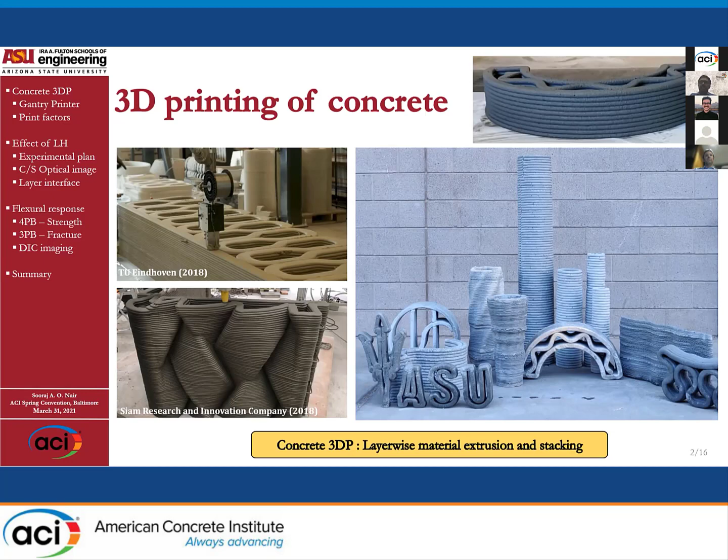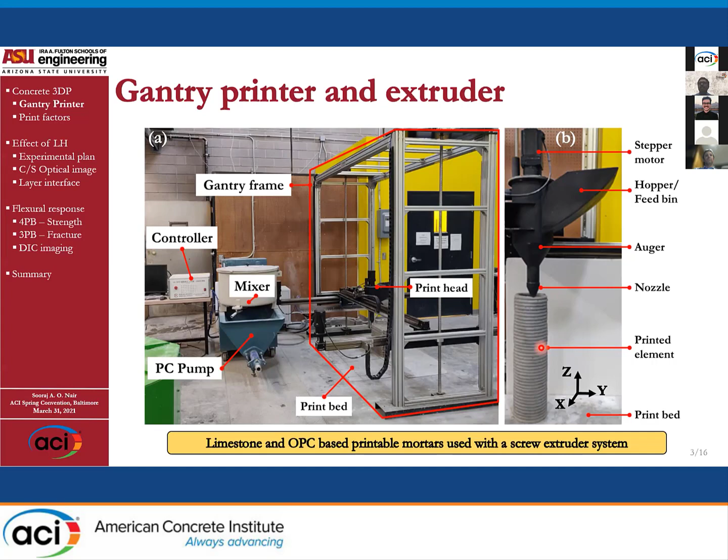But this whole presentation will be focusing on material extrusion, and this is the printer that we have used for this study. It's a gantry based one, with dimensions of approximately 1.5 meters in the XYZ directions, and we have a print head onto which a mixer pumps the material, but most of the time we directly feed the material into the hopper. It's controlled by a stepper motor with a screw extruder that extrudes the material to print, mostly limestone and OPC based printable mortars in our case.

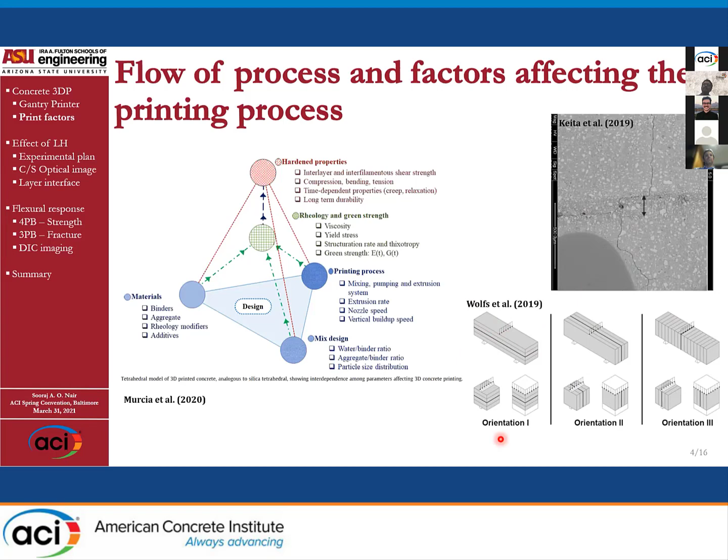Several other studies have reported relatively weaker interface regions due to drying or improper laying, which can affect your output strength. Because of these layers and the anisotropy, when we report the mechanical properties we generally do the testing in three different directions. But within the scope of this study, we'll only be looking at orientation number one, along the direction of the vertical printing.

As far as the experimental plan is concerned, we have a 20 mm diameter nozzle, and we take a typical filament having a layer width LW and a layer height LH, and we take values as a fraction of the nozzle diameter. In this study, we take 25%, 50%, and 75% of the nozzle diameter as the layer height, so it will be 5, 10, and 15 mm. The layer width is kept constant at around 1.1 to 1.15 times the nozzle diameter, so typically around 20 to

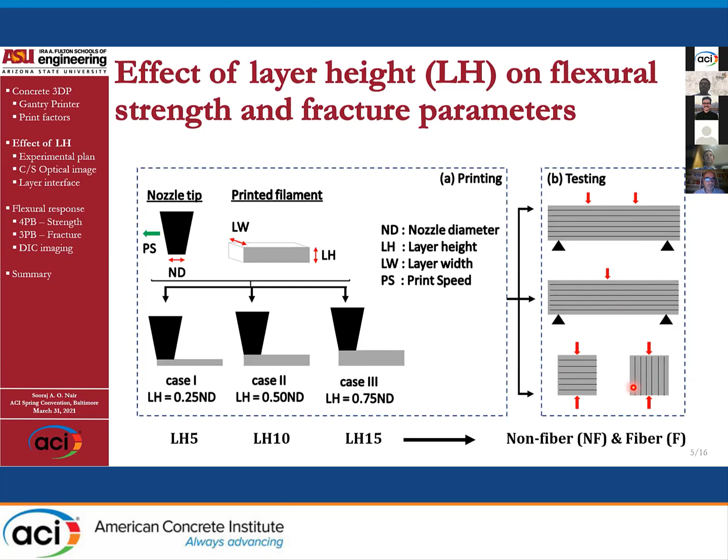22.5 mm. So we vary the layer height and then check the post-print hardened properties. Specifically, we do flexural testing, mostly 4-point bending and 3-point bending. We have an ongoing study looking at the compression effects as well, but for this presentation, we'll look at the flexural properties. We print slabs at these different layer heights, for the non-fiber and the fiber reinforced condition. The fiber reinforcement is 0.2% by volume of the overall mortar that we're using.

Then we cut them into beams of approximately 3 by 3 cross section, with a span of roughly 4 times the depth, and we subject them to 4-point bending for the flexural strength, and then 3-point bending with a notch to understand the fracture properties.

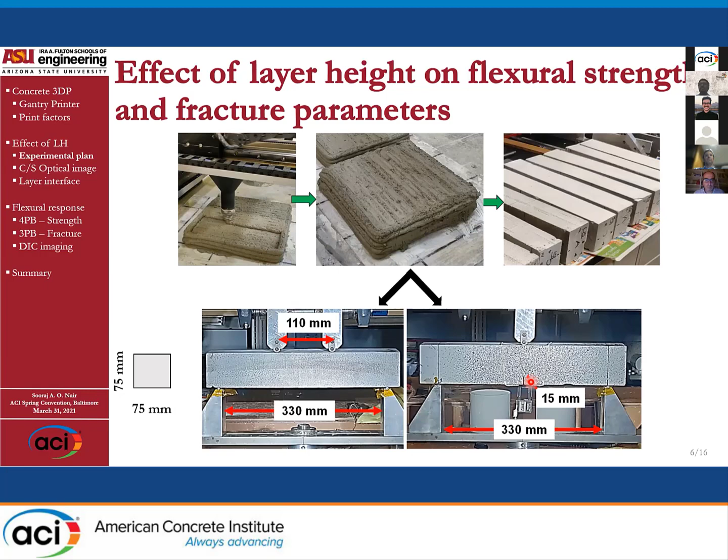Of course, after printing, we have to check the integrity of the printed beam. When we slice them to look inside, we see that when we increase the layer height, more defects are introduced. This is typically reported in literature. Although we made sure that the filaments are visually overlapping while printing and we don't see any gaps as such, we do see gaps between the filaments, and that tends to happen more when you increase the layer height, in both the non-fiber and the fiber reinforced case.

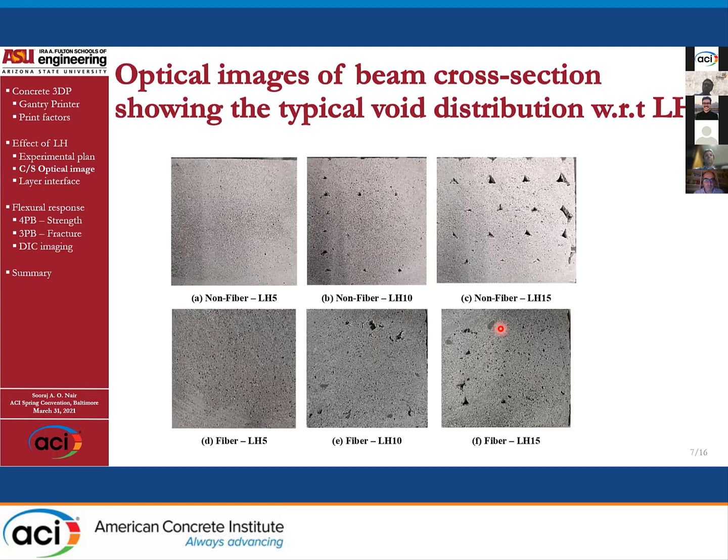So we have a non-fiber case and a fiber case at 5 layer height. Along the interface, we do see a micro pore present, which is typical because you have two different layers being laid one over the other. So there's definitely going to be a few air voids in there. But in the case of a fiber reinforced specimen, we do see the fibers sticking out. There are voids that encompass those fibers, or voids predominantly seen around the fibers.

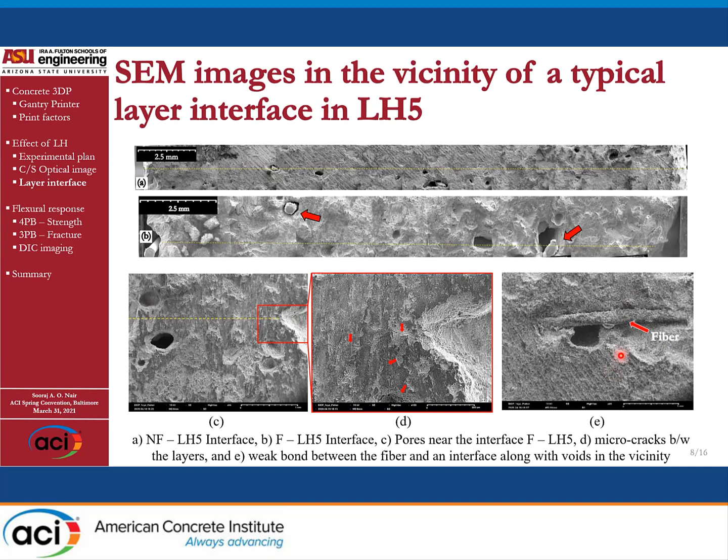The fibers tend to be dragged and scratch your interfaces to form more voids, and voids around the fiber. So the fiber to matrix bond also becomes weaker. As you increase the layer height, the chances for that scratching and dragging of the fibers, which causes defects in your printing, are much lower, and you tend to see better characteristics in flexural strength. The overall average flexural strength is definitely much higher with fiber reinforcement, almost 30-60% higher. But there seems to be a fiber to layer height incompatibility.

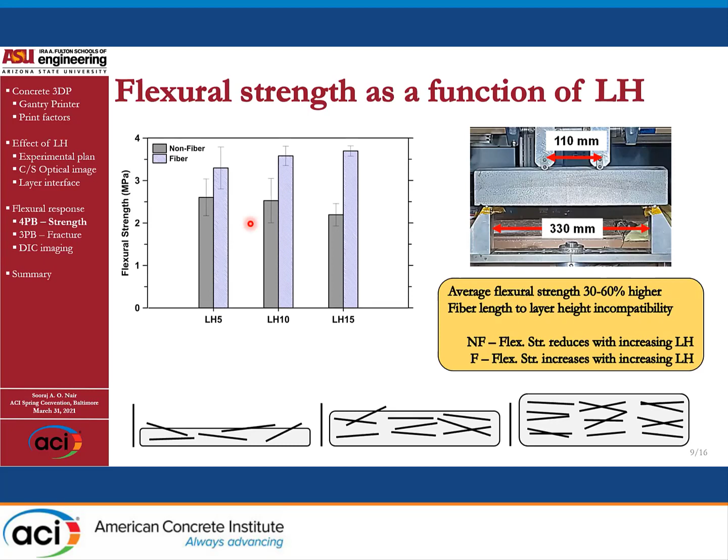And then we go for the 3 point bending case with a notched specimen. Specifically in this case, because it's a fracture characterization, we do a cyclic loading instead of the monotonic loading we do in the 4 point bending case. This one is for a non-fiber versus a fiber, and there is significantly increased residual strength for the fiber reinforced specimens.

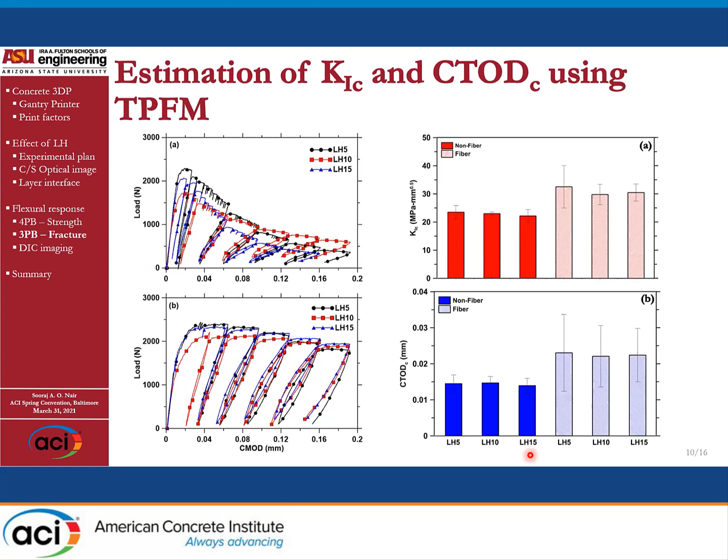Using the unloading compliances and the two-parameter fracture model, TPFM, we calculate the fracture toughness and the critical tip opening displacement. Generally, we don't see much of a difference for these two parameters; for KIC there is a marginal reduction in the case of a non-fiber reinforced specimen, but the critical tip opening displacement is more or less similar. But the fracture energy release rate shows much more sensitivity to layer height as well.

So a typical layer height 5 to 15 comparison is given over here, where fiber specimens show almost 2 to 3 times higher fracture characteristics for a lower layer height, and fiber reinforced specimens show a 2 to 3 times increase versus the non-fiber specimens.

And if we calculate the inelastic and elastic parts of the fracture energy release rate, you see a much higher inelastic strain energy release rate in the case of fibers, because the fibers tend to bridge the cracks, although the elastic portions are more or less the same. So fibers definitely help in a higher strain energy release rate. And what we think is that when you have a larger number of interfaces, each of those interfaces acts like a crack barrier or an energy dissipation medium.

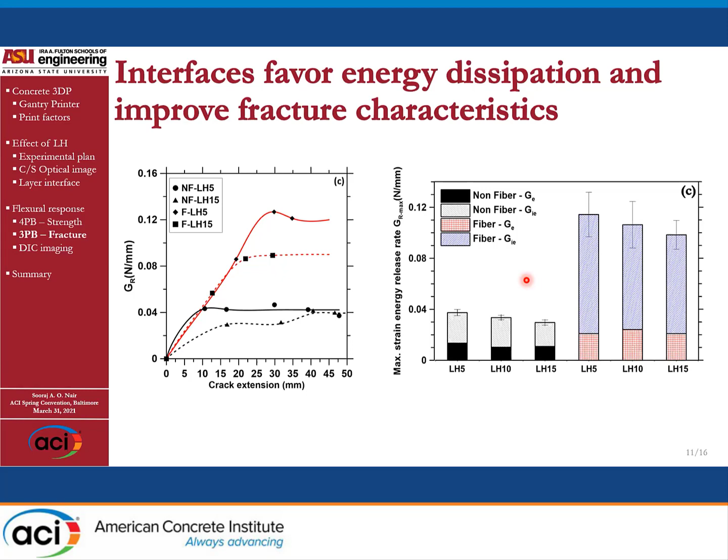So when there are a larger number of interfaces, when you choose a lower layer height, your strain energy release rates would be much higher, and some of the results using digital image correlation are to follow.

So, like I said, we have seen that cracks tend to deviate along the interfaces as shown over here. And if you have weaker voids, then it tends to branch into those voids as well. But we also see crack branching along the interface, and typically, eventually they join in front as well.

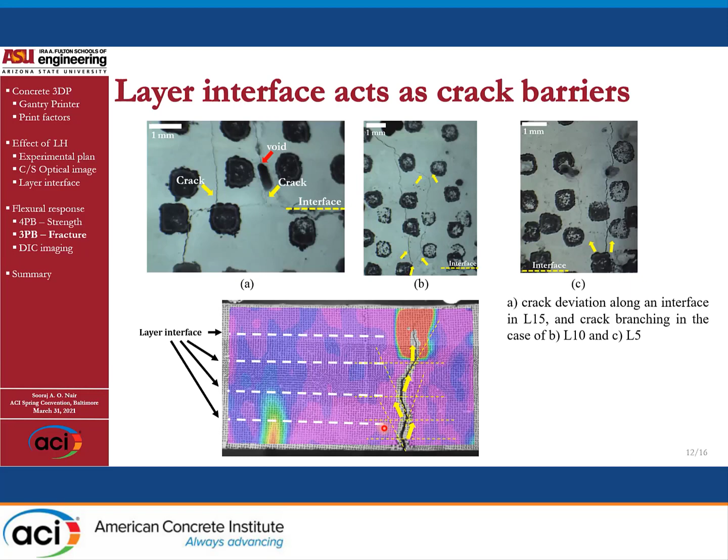This is a case where in a 4-point bending case, you see that along the interfacial lines the cracks change directions much more significantly, instead of proceeding in one particular direction, which also shows that layer interfaces act as crack barriers.

Now, to visually characterize this or observe what exactly is happening, we also did digital image correlation on the flexural specimens, and in this case it's for the 3-point bending case, and you can see the notch in each case. First is the 5 mm layer height, and as you go down, it's the 15 mm layer height. And I've shown images from different points in the loading cycle, like 50% peak, 90%, and the peak, and beyond the peak with the first unloading point and the second unloading point.

And this is mainly because, let's say for a typical 15 mm length in front of the 15 mm notch, you have 2 to 3 interfaces in case of a layer height 5, versus in case of a layer height 15, you have like one layer interface. So the energy needed before the crack starts to form and propagate is much higher, as shown earlier in the previous slides, and that's what we see in the DIC case also.

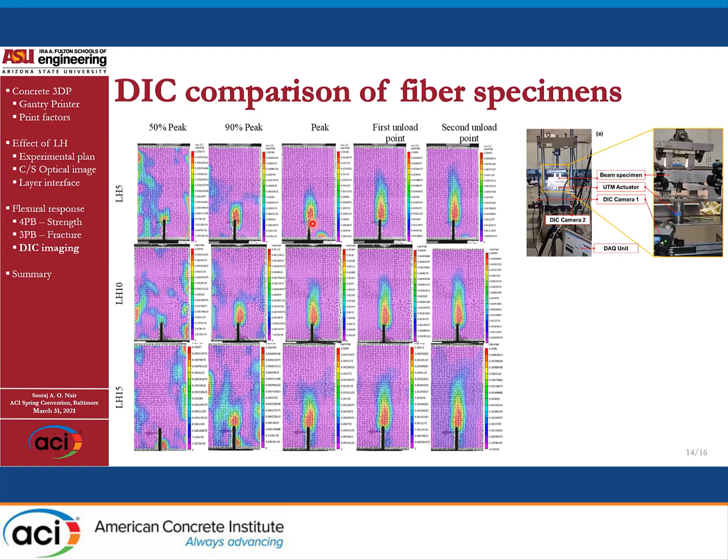So that's really interesting. When we compare it to the fiber reinforced specimens, we really don't see much of an effect in the post-peak case, and that's mainly because the fibers in the post-peak region get active, and the fracture process zones look more or less similar in the case of fiber reinforced specimens. Although for the LH5 case in the fiber, you can see that the fracture process zone was much smaller, and that is in continuation to the lower strengths that we saw in the flexural strength for layer height 5 fiber specimens.

And if we use the DIC to find the crack tip opening displacement and plot it with respect to the crack extension, you could see that the tip opening displacement moves much faster in the case of non-fiber specimens, whereas it's much more lagged and delayed, and it shifts to the right for the fiber reinforced specimens. And these lines correspond to the critical crack tip opening displacement calculated from the two-parameter fracture model.

And you could see that the LH5 critical tip opening displacement is generally a little bit higher than the LH15 case, or more or less the same. But it tends to shift in the case of fiber reinforced specimens when compared to the non-fiber reinforced specimens.

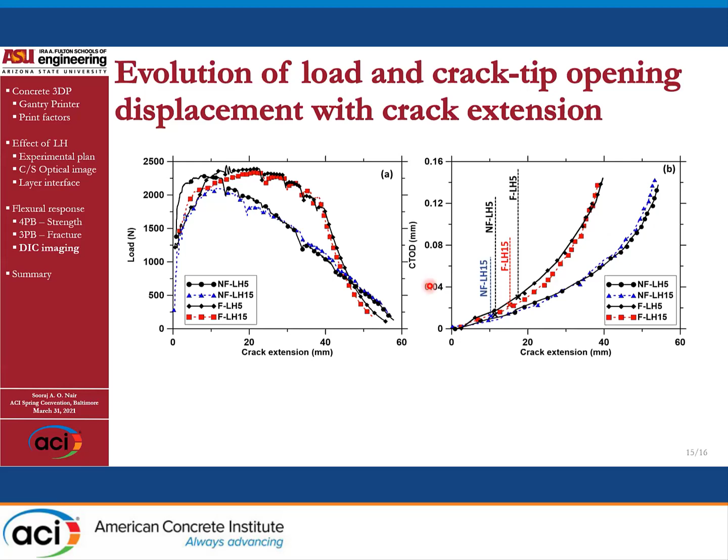So in summary, from what we have observed, when you increase the layer height, if you're not using fiber reinforcement, we tend to see a reduction in the flexural strength. But adding fibers tends to improve and restrict the influence of the layer height, is what we want to put forward.

Now, these layer interfaces act as crack barriers and improve the fracture response. So they are weaker when compared to the bulk, but how much weaker is a question, and it has to be characterized, which is not covered in the study.

But if you have a proper nozzle pressure and these layers are laid with that pressure, there are chances that the interfacial strengths could be not that different from the bulk, but it's relatively weaker, and which is advantageous in terms of the fracture resistance of the specimen.

And when we use a fiber, this is a major takeaway from the study, that especially when we use a stiff or rigid fiber like a steel fiber, there is a possibility of having a fiber length to layer height incompatibility that could be detrimental to your printed structure. So it is always recommended, at least for rigid fibers, to choose a layer height which is relatively higher than the fiber length that we are taking.

So in this case, it was 13 mm fiber, and we could see that a 15 mm layer height was much better when we are using steel fibers. And these results, at least within the scope of this work, are not applicable for flexible fibers like polymer fibers, but specifically for steel fibers, this is really important.

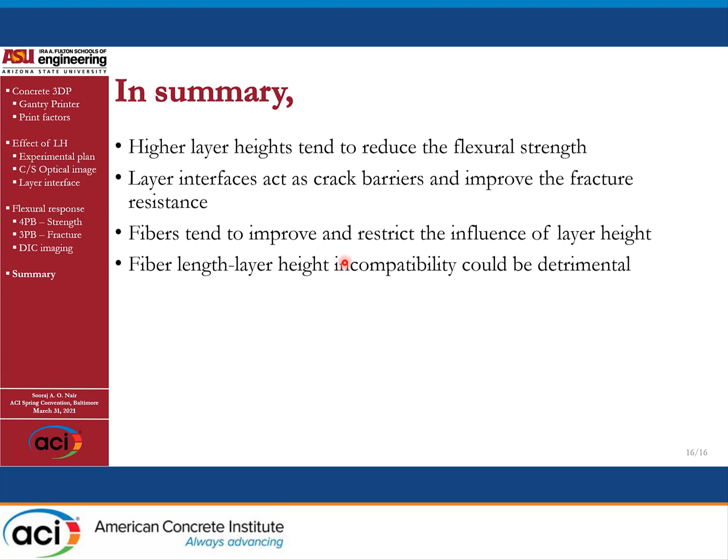Thank you. So I see one question, and I think you did answer this in the presentation, but did you cut specimens from layers? I assume that means printed samples. And then I have a follow-up question from me. An ASTM standard has pretty stringent parameters in terms of dimensions and out of planeness. How did you ensure that the specimens were planar when you cut them?

Okay. So what we used was a normal tile saw to cut the beams out of these slabs, and like I said, there was a little bit of dimensional tolerance that we had to give when targeting a 75 by 75 cross section. We tried to keep it as much as possible within that dimension, but if there were 1 or 2 mm differences, we measure them and incorporate them in the calculation that we make later.